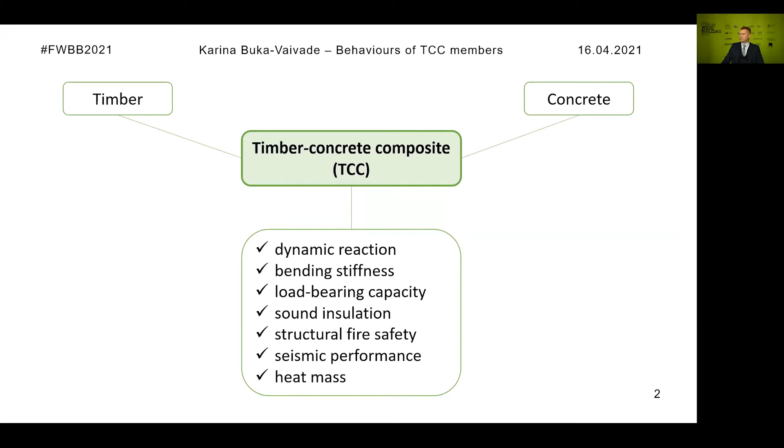Hello, my name is Karina Buka-Vaivade, and today I would like to present here research about behaviors of timber concrete composite members. Timber is a renewable material that makes a significant advantage for its use in construction, and concrete is the most widely used man-made building material.

Timber concrete composite structures can ensure more efficient use of resources and meet the growing demand for sustainable structures. Combining such materials as timber and concrete can improve various classical disadvantages of wooden floors, such as dynamic reaction, bending stiffness, load-bearing capacity, sound insulation, structural fire safety, seismic performance, and heat mass, etc.

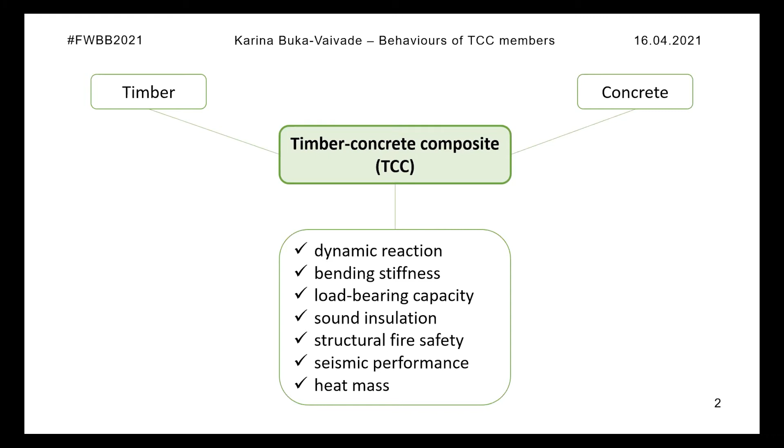Timber concrete composite enables to combine advantages of pure timber and pure concrete in one structural member, especially in the case when the rigid timber concrete connection is provided. As you can see on the slide, full composite action provides much smaller deflections and provides concrete layer action in a compression zone only, in comparison with the cases when partial composite action with semi-rigid connections or no composite action are provided.

The adhesive connection of the timber concrete composite members is more effective in comparison with semi-rigid connections, so it provides high bending stiffness. But there is one important moment. It is difficult to predict the quality of the obtained connection with the classical production methods of continuous rigid connection when timber layer and precast concrete layer are simply glued together.

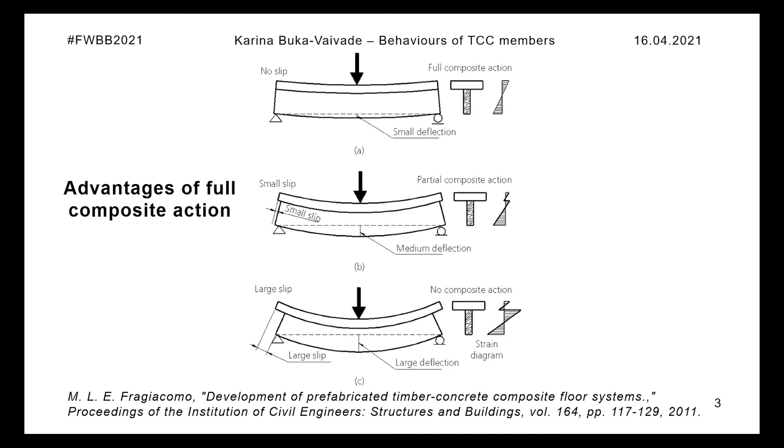And so the aim of the study is investigation of influence of the granite chips, which is proposed to use in timber to concrete rigid connection production, on the behavior of timber concrete structural members subjected to flexure. On the slide, you can see proposed production method of rigid connection between timber and concrete layers. It provides preparation of the timber base, applying glue layer on timber surface, gluing granite chips, and after drying of glued layer, placing a fresh concrete layer.

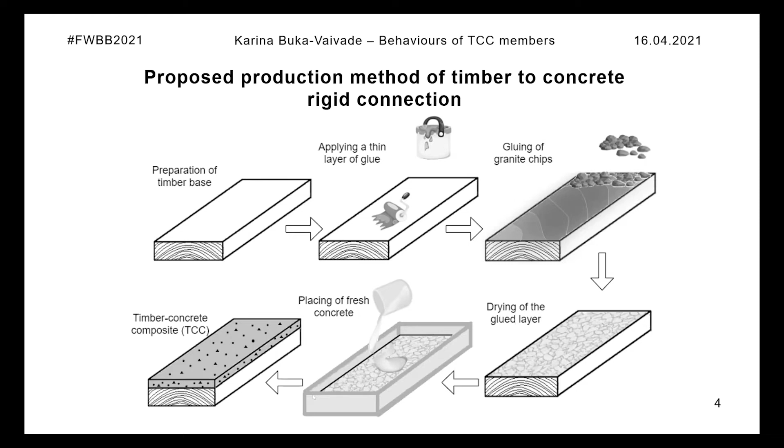To investigate the behavior of timber concrete composite, 4 types of specimens were prepared for laboratory, analytical and numerical analysis. The first specimen was pure CLT panel with length 2 meters, width 35 centimeters, and height 6 centimeters. The second specimen was glued together, identical to the first specimen CLT panel, with precast 3 centimeters thick fine-grained concrete layer with strength class of C20.

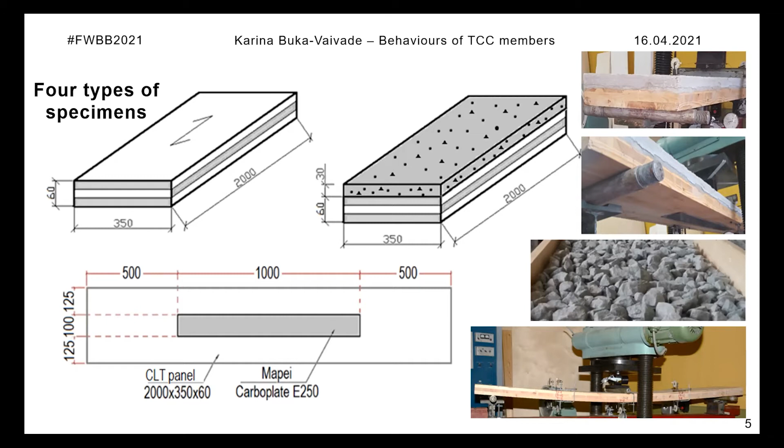The third specimen was like the second, but with additional carbon fiber plate glued to the CLT surface in tension zone. Here you can see in the specimen carbon plate. And the fourth specimen type was identical to the third, but a rigid connection was produced by proposed method, which includes the gluing of the granite chips on the CLT surface and then placing of fresh concrete layer. All the specimens were with 1.8 meters span and were tested in 3-point bending until the collapse.

And here you can see comparison of the behaviors of the CLT panel obtained by experimental data and calculations, and of timber concrete composite panels, pure and with carbon plate, produced by classical dry production method and calculations. As it can be seen from the load displacement curves, at the load of 15 kilonewtons the pure CLT slab formed 28 millimeters large displacement. But in timber concrete composite, displacements are equal only 11 millimeters. So the concrete layer has a significant effect on the deformability of CLT panel.

But as you can see, experimentally obtained curves for timber concrete composite obtained from bending test are characterized by less stiffness in comparison with analytical calculations and numerical results. Moreover, behavior of timber concrete composite with carbon fiber plate, which was produced by classical rigid connection method, is identical to the pure timber concrete composite. At the same time, according to the analytical calculations, bending stiffness of timber concrete composite with carbon fiber plate is almost 1.5 times larger than bending stiffness of timber concrete composite.

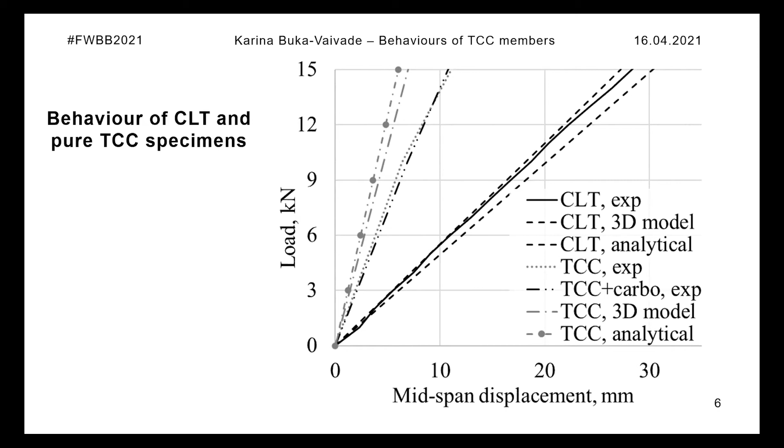The reason for this is the poor quality of the glued connection obtained by classical dry production. Here you can see a view of a timber concrete composite panel produced by the classical dry method, when the CLT panel is simply glued together with a precast concrete layer, after the concrete layer collapsed. It can be clearly seen here that a qualitative connection was formed on less than 30% of the total connection surface.

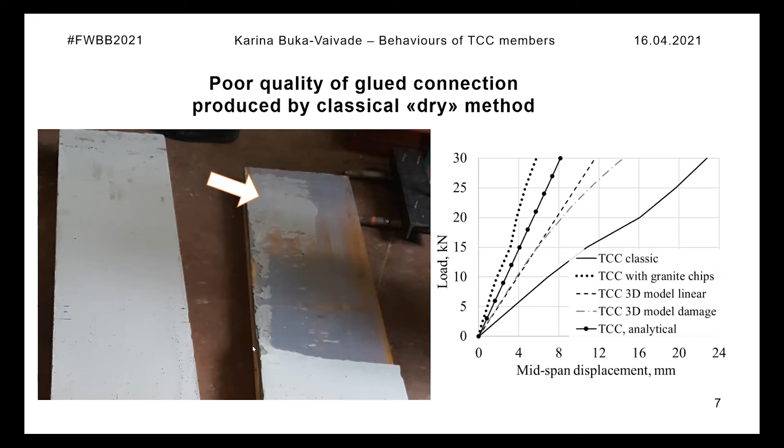In this figure are summarized load displacement curves of timber concrete composite with an additional carbon fiber plate in the tension zone, produced by the classical production method and by the proposed one with granite chips. These curves are obtained by 3-point bending test.

And here are also summarized load displacement curves for timber concrete composite obtained by numerical linear and non-linear analysis and analytical calculations. It can be seen that the timber concrete composite without granite chips develops much larger displacements than those obtained in the calculations. At the load level of 30 kilonewtons, the experimentally determined displacements are equal to 23 millimeters, which is more than 52% larger than those calculated with the 3D damage model.

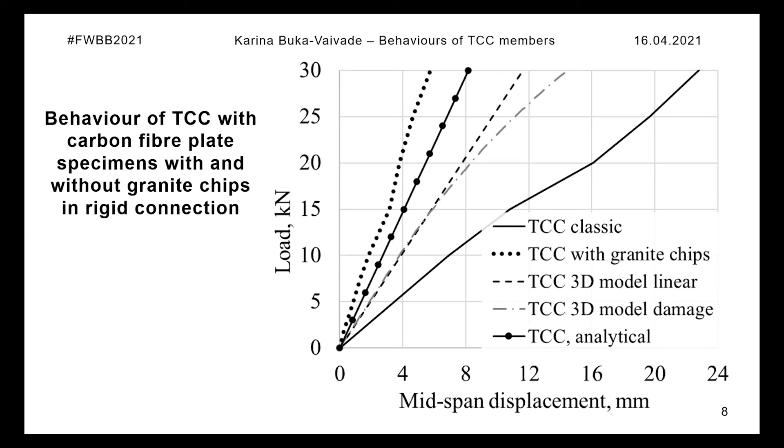The strengthening effect that can be seen in this figure for timber concrete composite with granite chips can be explained by this figure, because cement paste has worse strength than aggregates. And so granite chips as concrete aggregate locally increase the strength of concrete, which can be observed at the stage when non-linear behavior begins to develop in timber concrete composite by numerical analysis. Here you can see the strengthening effect.

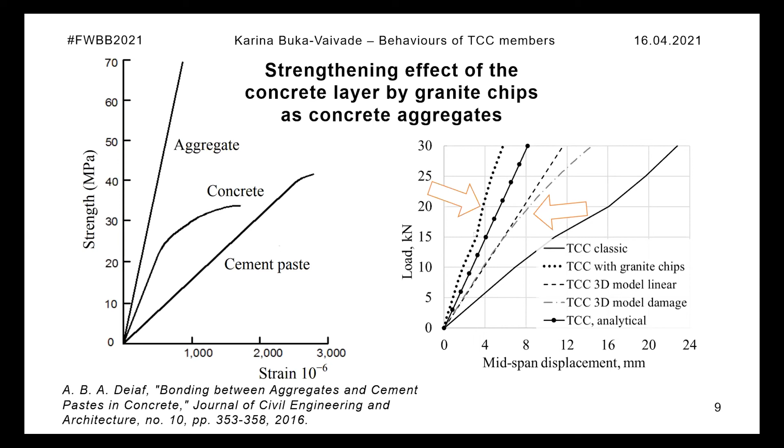As a result of the research, the following main conclusions were obtained. Timber concrete composite allows to decrease such a CLT problem as large deflections and provides more rational use of the strength of the material. Experimental results show that even with classical production of timber concrete composite rigid connection, the concrete layer allows a 2.55 times decrease in mid-span displacements.

The use of the classical production method for rigid connection, when the timber layer is simply glued together with a precast concrete layer, is dangerous because it is difficult to predict the quality of the obtained connection. So it is not safe to predict the behavior of such timber concrete composite by models with full composite action. The rigid connection produced by gluing of granite chips allows visual control of the glued connection quality and provides natural development of the bond between the concrete matrix and granite chips as aggregates of concrete. Moreover, granite chips can provide local strengthening of concrete.

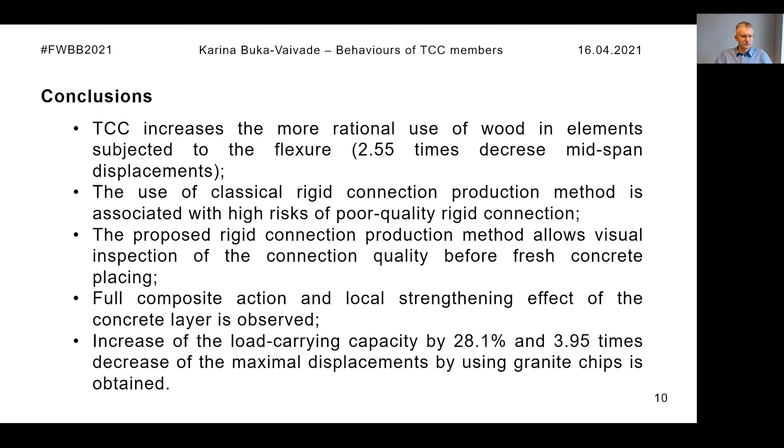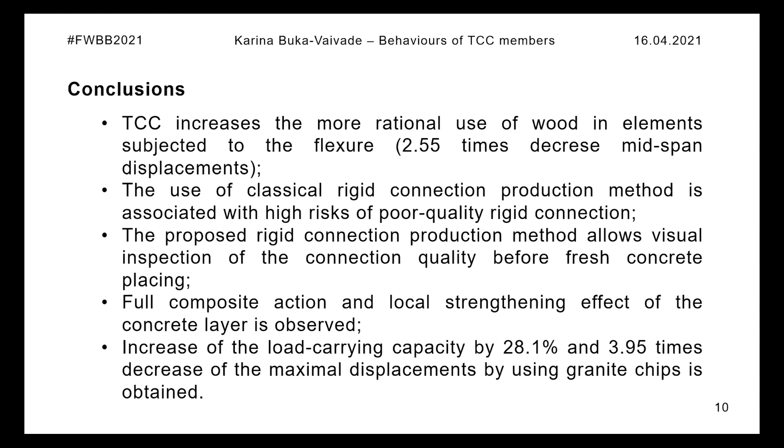By using the proposed production method of rigid connection between timber and concrete layers, a timber concrete composite with full composite action was obtained, whose behavior is safe to predict by analytical or numerical models. The load carrying capacity of these specimens increases by 28.1% in comparison with classically produced timber concrete composite, when materials are glued together without granite chips. And mid-span displacements at the load level of 30 kilonewtons were almost 4 times smaller for the proposed timber concrete composite in comparison with the classical one. So thank you for your attention.